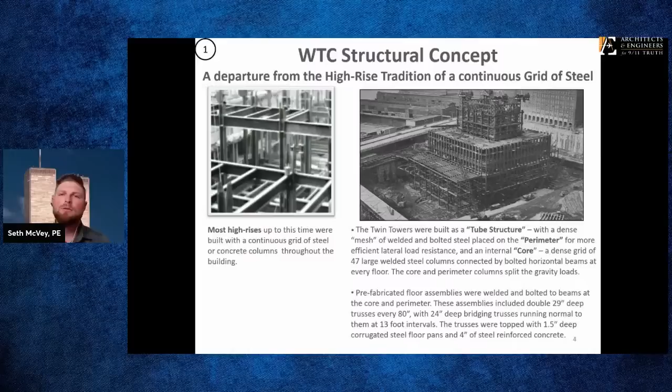John Schuler, another presenter doing this, likes to use the example of the Eiffel Tower, which I think is a really good one. You can see how the Eiffel Tower has this wide base - picture yourself standing with a wide stance in your legs, it makes it difficult to knock over a structure of this type. The perimeter columns acted in a similar fashion, holding the lateral loads of any load that would be put laterally on the building.

Here's a plan view of World Trade Center buildings 1 and 2. You can see that they were 207 feet by 207 feet, so each floor was almost an acre. The largest floor span, on the long side of the core columns, was 60 feet connecting to the perimeter columns. The core itself was approximately 135 feet by 87 feet.

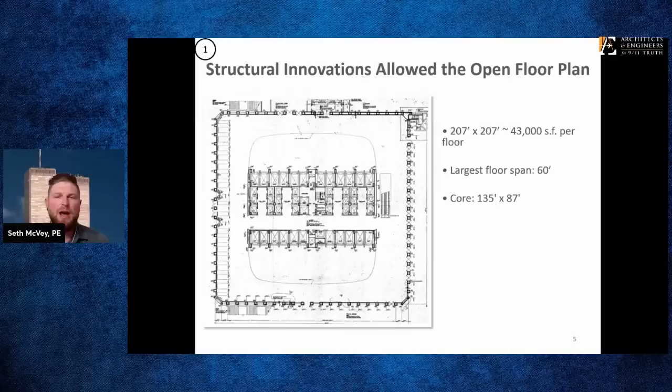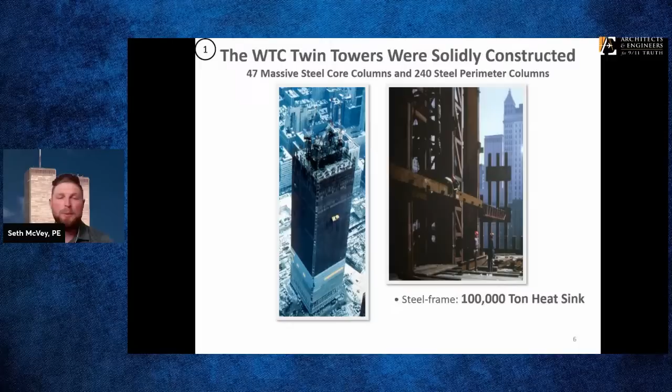Like I stated earlier, the core tubular structure consisted of 47 massive steel core columns and 240 steel perimeter columns - 60 columns on each side, spaced at approximately 3 to 4 feet apart. There was a lot of steel in these buildings, which made them very resistant to any type of load they would experience.

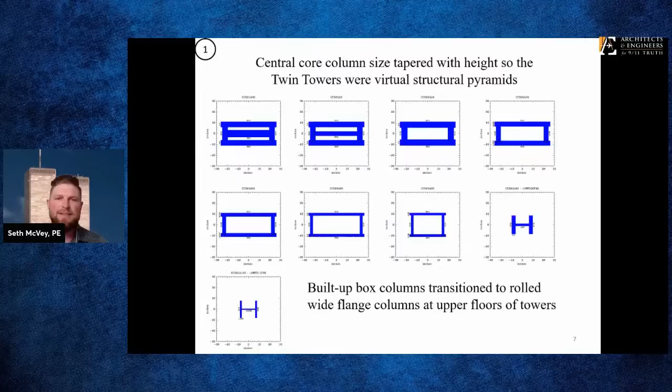And as you go up in altitude, you can see that the columns lessened in their denseness because they had less load to carry.

In addition to the thicknesses varying, there were also different strengths of steel used. 12 different strengths of steel were actually used in the construction of these two structures, in the perimeter columns of the towers, to accommodate the wind load and seismic stresses while keeping the gravity-induced unit stress on both perimeter and core columns on each floor the same. So they utilized 12 different steel strengths so that the floor weights would distribute evenly to the inner tubular columns and to the perimeter columns, so you wouldn't get warping of floors or anything like that. They did account for the wind and seismic loads, as we'll see here in a little bit.

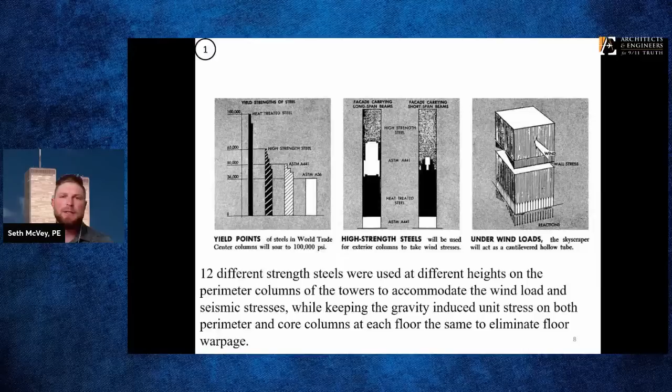So let's get into a little bit about the plane impacts.

The North Tower was hit first, at approximately 8:45 in the morning. Flight 11, American Airlines Flight 11, a Boeing 767, crashed into the north face of the North Tower at approximately the 96th floor, going approximately 473 miles per hour. The plane that hit the South Tower hit at approximately the 85th floor at approximately 9 o'clock in the morning. It was also a Boeing 767 going approximately 566 miles per hour.

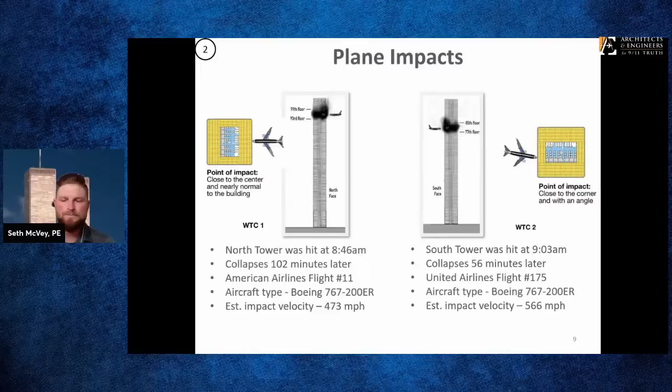You can see here on the right that the plane impacted the South Tower along the short edge of the tubular structure at an angle, whereas the plane that hit the North Tower hit the tower pretty much straight on, but along the long side of the tubular structure, which is important to consider, which we'll get into in a second.

This is the North Tower. You can see where NIST has claimed, and we agree with, the impact location of the plane entering the building. It entered the long side of the tubular structure core, and it was pitched downward at approximately 11 degrees. It hit at the 95th floor, but NIST claims that collapse initiated on the 98th floor.

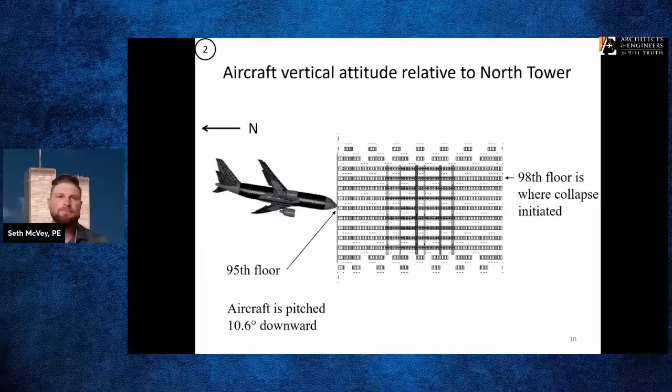According to the NIST report, the wings are rolled 25 to 30 degrees from the horizontal.

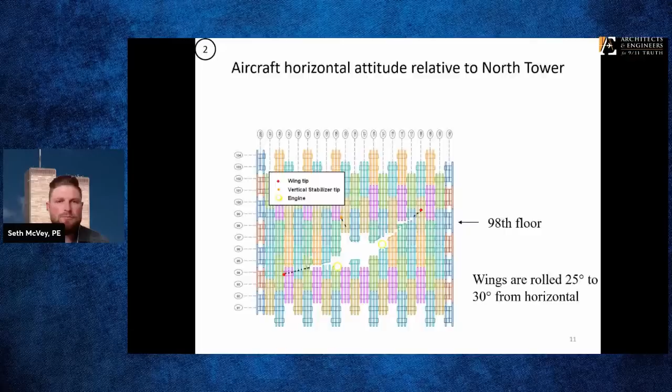Here's a video of Charles Thornton, a structural engineer who was part of the FEMA investigation, discussing the wind loads and lateral loads that the World Trade Center buildings were intended to take. The fact that they were designed to resist over 13,000 tons of wind pressure meant that they could not be knocked over.

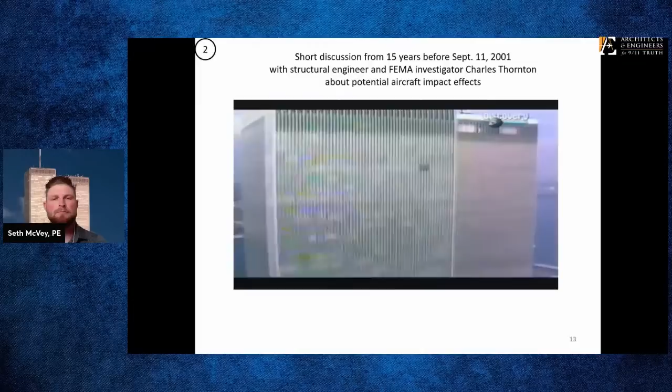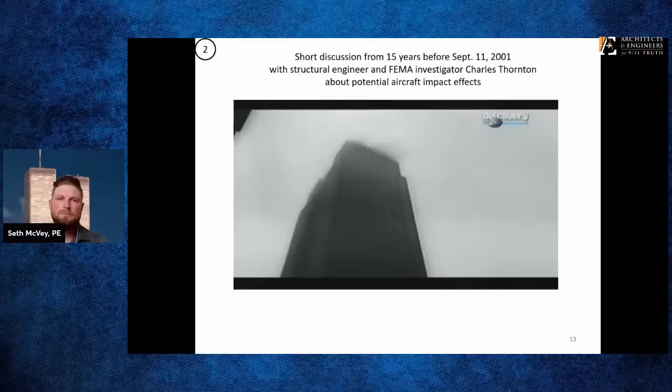In a remarkably prescient interview given over 15 years ago, Charlie Thornton, now one of the investigators, considered the scenario: 'Well, 13,000 tons is a lot of force. People always talk about an airplane crashing into a building. In 1944 or 45, a plane did crash into the Empire State Building. But the largest aircraft flying today, at least commercially, the 747 fully loaded, is on the order of 300 tons. So if you think about a 300-ton element crashing into a building that's been designed to carry 13,000 tons, you can see that an aircraft crashing into the World Trade Center would probably not do anything to the major building. It could affect localized structural elements, could knock out a column, and there could be some damage. But as far as a plane knocking a building over of that type, that would not happen.'

Since the Empire State accident had shown that a plane could crash into a New York skyscraper, the designers were forced to consider this. You heard it from Thornton that these buildings were designed to take 13,000 tons of lateral load, including wind, seismic, or an extreme event like a plane crash. Although at the time of construction a Boeing 767 hadn't been created yet, the fact that it overcompensated for those lateral loads means this building could not be knocked down by an airplane impacting it.

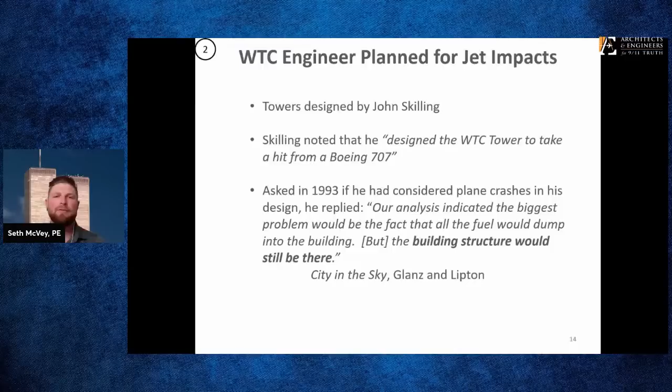The World Trade Center engineer who designed the buildings was a guy named John Skilling. Skilling noted that he designed the towers to take a hit from a Boeing 707. In 1993, he was asked if he had considered plane crashes in his design. He replied, 'Our analysis indicated the biggest problem would be the fact that all the fuel would dump into the building, but the building structure would still be there.' So he over-designed these structures with huge factors of safety, enough to take a very large airplane hitting it at 400 to 500 miles an hour.

So further into the impact of the planes, the robustness of the perimeter frame tube system and the large size of the buildings helped the towers withstand the impact, according to NIST. The structural system redistributed the loads without collapsing at the places of aircraft impact. NIST even admits that because of the over-design of the perimeter columns, tubular columns, and steel trusses in the building, there was no way, due to redistribution of loads and redundancy within the structure, that this building would have fallen — let alone fallen within its own footprint in a symmetrical collapse.

The towers withstood the initial impact of the aircraft. The buildings had more than 1,000 times the mass of the aircraft, so this ability to withstand the initial impact is hardly surprising. Numerous people have admitted that this building could not have collapsed due to the impact from the planes.

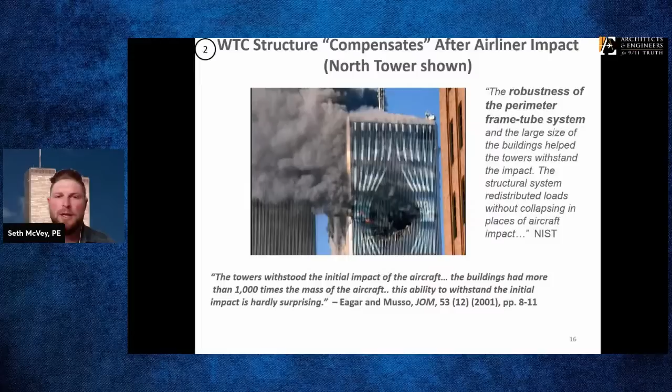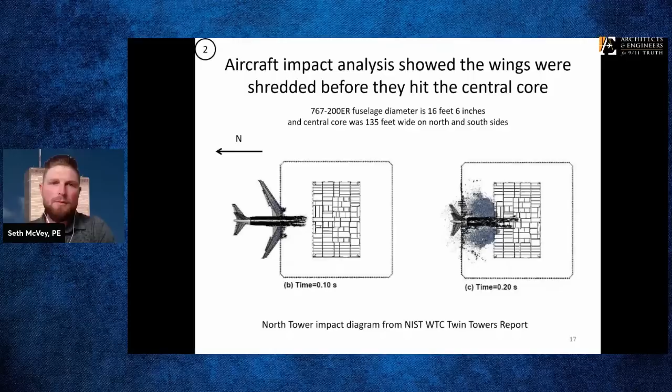Aircraft impact analysis showed the wings were shredded before they hit the central core. This is a diagram of the North Tower — the figure on the left shows the plane entering the structure and shredding the fuselage, and on the right you see the plane after its wings were shredded due to the complexity of the frame itself. The columns and steel trusses just shredded this airplane. There's no way it could have reached the core columns at the speed it was going — it was dramatically demolished by the time it was even inside the building.

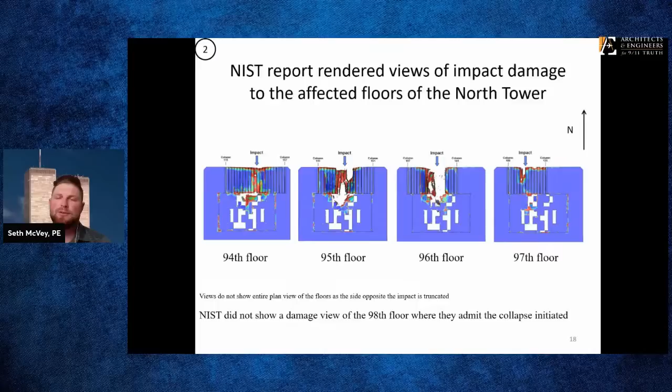This is from the NIST report, showing rendered views of the impact damage on the North Tower at various floors. You can see the 94th floor had not so much damage, the 95th floor a little more, and the 96th floor, where they say it actually entered the building, has the most damage. The 97th floor again shows not too much damage. But NIST claims that at the 98th floor — which they don't even include a diagram for — is where collapse initiated. Yet just looking at the 97th floor, the impact damage to the 98th floor couldn't have been that much. So why did it fail there?

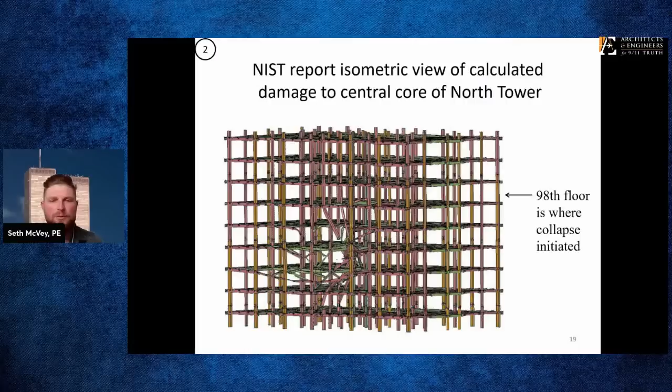Here's an isometric view of the impact damage done to the steel frame of the structure. You can see the 98th floor called out here — not too much damage on the 98th floor. If you'd think this thing would have failed from anywhere, it would have been the 96th floor where it actually hit. Okay, jet fuel effects.

Like John Skilling stated earlier in that quote I gave you guys, he was mostly concerned with jet fuel dumping into the building and causing issues that way. But in the NIST report, they did a sensitivity test on the jet fuel effects at various floors.

You can see here in the diagram the amount of fuel that was left on each floor. On the 98th floor, where collapse initiation happened, there was only 240 gallons of jet fuel supposedly there. However, they also state in their sensitivity study that the amount of fuel spilled in the simulation only influenced the results of the first few minutes. The long-term behavior of the simulated fires was unaffected.

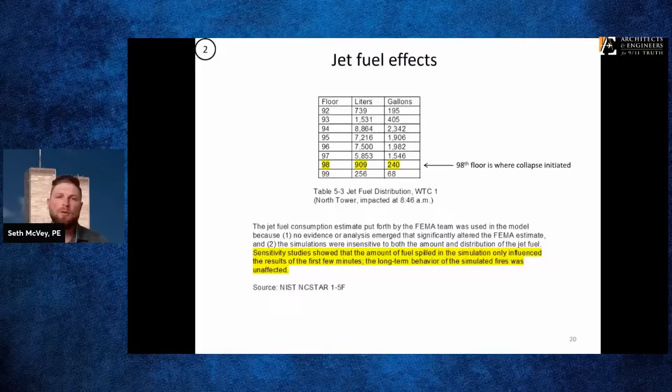So essentially what that's saying is that the long-term effect of jet fuel burning and melting the steel was not there. The jet fuel burned up, aerosolized, and upon impact - which was the explosions you see supposedly when the planes hit the towers - most of the jet fuel was actually burned up in those first few seconds, and it wouldn't have caused melting of steel or catastrophic behavior like we witnessed.

So this is a summary of why the aircraft impact and jet fuel would not have caused the collapse. The wings would not have made it to the central core, which is where the jet fuel was kept, so there was no fuel dumping down the elevator shafts or anything like that. They were shredded upon impact.

And like we saw in the diagrams, only the fuselage, if it made it to the core columns, would have affected the core columns. Most of the jet fuel was aerosolized on impact, again referring to the explosions, with much of it remaining outside the building. The fuel which did enter the building burned up within minutes due to the fires.

The redundant steel frame redistributes load, so the aircraft impact could not have caused collapse due to the redundancy of the structure itself. And like I mentioned earlier, the factor of safety John Skilling used to design against vertical collapse for the perimeter columns was 5-to-1, meaning each perimeter column was designed to take 500% of the expected load it was to carry.

And for the central core columns, they were designed to take 300% of the loads they were expected to experience. This is far too high for the impact damage to approximately 20% of the columns to have caused collapse.

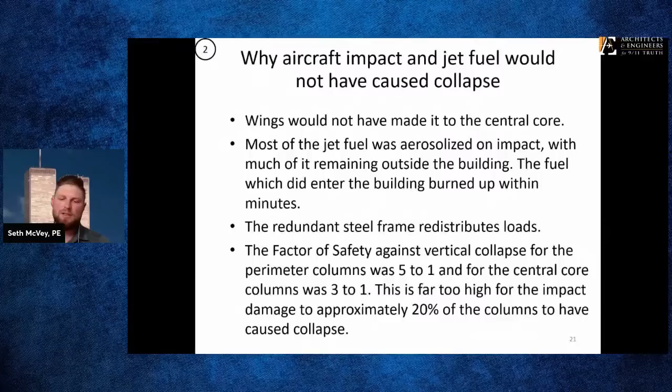It should be noted that this 20% of columns damaged was across 5 floors, since these planes hit near the top of the buildings. So you still had 90-plus floors of non-damaged columns to resist the load and provide redundancy. So for the towers to fall as they did just doesn't make any sense.

So getting into the NIST column failure theory - the official United States government theory - this is what they say: the exterior columns were pulled inward by heating and sagging of the floor trusses, causing them to buckle and initiate the global collapse.

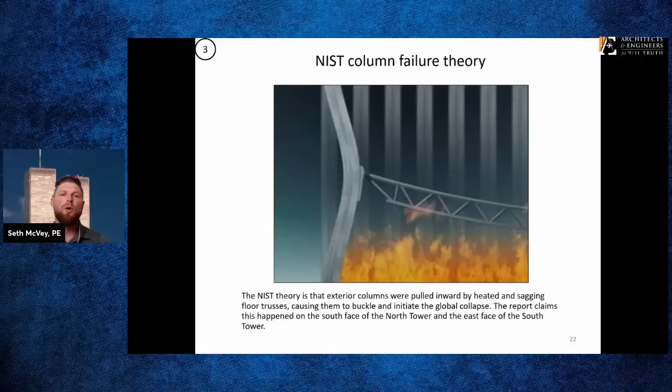The report claims this happened on the south face of the North Tower and the east face of the South Tower. So as the fires burned, they heated up these steel frames and started to pull on the perimeter columns, causing global collapse.

Sagging in the detailed truss model - so after the members buckled, the truss pulled the exterior columns in. This is from NIST, this is what they claim: after web members buckled, the truss pulled the exterior columns in. The tension force ranged from 9 to 14 kips per column in this model at the exterior column.

You can see as the temperature increased, it started to pull in the columns on the perimeter through these trusses. And in the upper figure here, which was a finite element analysis done by NIST, there was buckling of web members. So they had vertical displacement and sagging in these trusses, which they claim pulled on the perimeter columns between 9 and 14 kips.

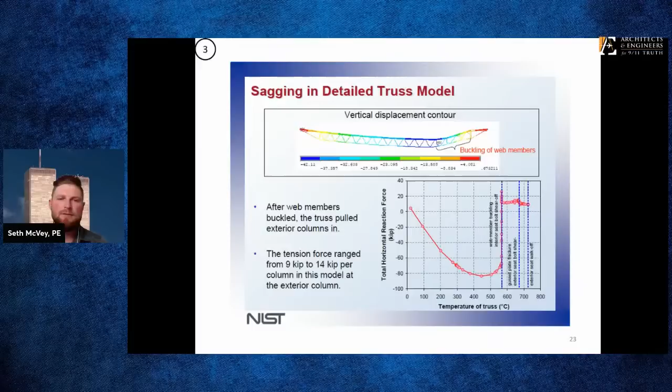This is the ANSYS model of the 96th floor from NIST of World Trade Center Building 1. ANSYS is a commercial finite element software used for modeling complex structures, including buildings and bridges and anything else you want to do. You can see here they have the floor trusses, then the bridging trusses in between, and the perimeter columns here.

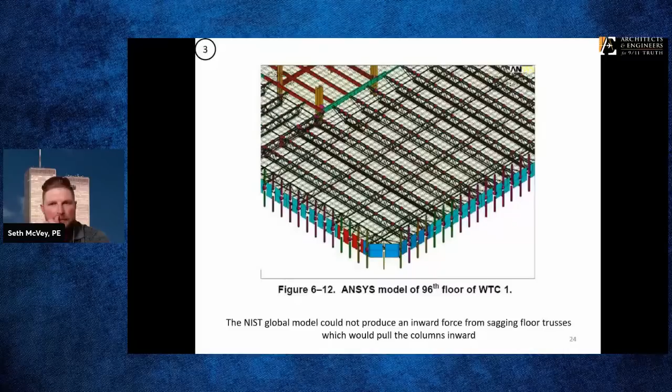What's important to note is that the NIST global model of this floor could not produce an inward force from sagging floor trusses that would pull the columns inward. So that 9 to 14 kips they claim was able to pull these columns inward, leaving the south and east faces of the north and south towers unsupported for that whole floor, there's just no evidence to support that.

This is an artificial force. It's not a real force. There's no reality behind it. They needed to apply this force in order to get the model to react the way they said it would. So they're just pulling stuff out of their you-know-whats.

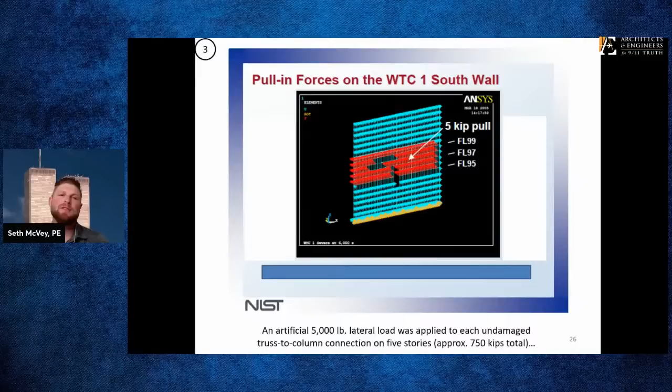Again, this was applied over 5 stories for a total of 750,000 pounds of artificial force that the buildings did not experience.

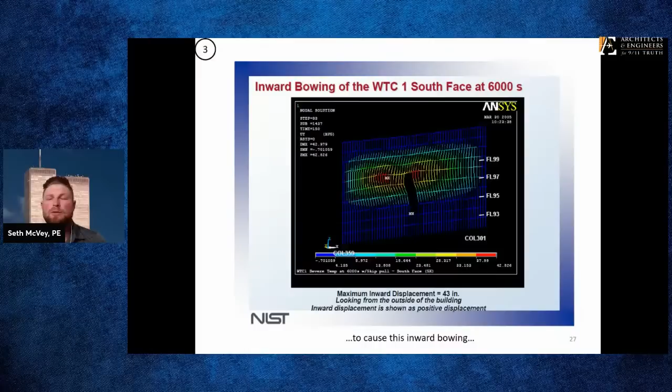To cause this inward bowing, that 750,000 pounds, to get the bowing shown on screen here with a maximum deflection of 43 inches—we're looking at the face of the building here—they needed to apply that 750,000 pounds, which was not there. So without that, the deflection they claimed happened, 43 inches, to get those columns to buckle and fail, is not real. It's crazy.

The NIST report explanation for collapse initiation and propagation of the North Tower: this is what they say about the North Tower collapse. With the continual increased bowing, as more columns buckled, the entire width of the south wall buckled. Because of this artificial force they put on, they say the bowing of the perimeter columns continued to increase, and as more of them buckled with that force, the entire width of the south wall buckled—all 60 columns along that side buckled because of this artificial force.

Instability started at the center of the south wall and rapidly progressed horizontally towards the sides. As a result, the buckling of the south wall significantly unloaded, redistributing its loads to the softened core through the hat truss and to the east and west walls through the spandrels. So, like we said earlier, the loads were redistributed, but as John Skilling stated, the redundancy of the system and the factors of safety used meant these core columns could accommodate that type of load. It had a factor of safety of 3. It mentions a hat truss here, which we'll get into in a second.

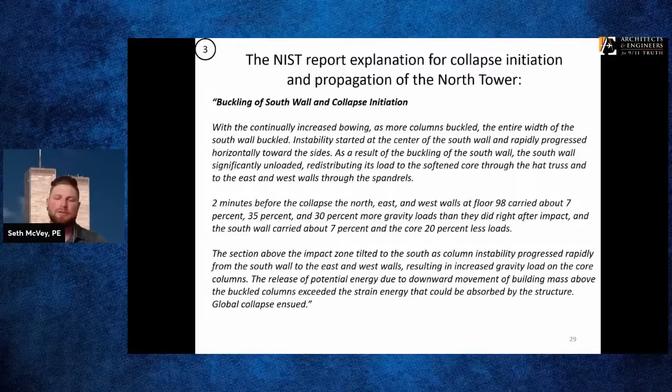The section above the impact zone tilted to the south as column instability progressed rapidly from the south wall to the east and west walls, resulting in increased gravity load on the core columns. The release of potential energy due to downward movement of building mass above the buckled columns exceeded the strain energy that could be absorbed by the structure. Global collapse ensued. So this is where you get into a bit of the progressive collapse theory.

The problems with this NIST report explanation for the collapse initiation and propagation: there's no evidence or basis for the claim that sagging trusses could pull in the south wall of the North Tower. Because they applied this artificial force of 5,000 pounds at every truss column connection, they were able to get it, but that load is not reality.

This wasn't observed in reality based on the footage. Like it says, the NIST model did not generate the loads on the south wall columns needed to pull them inward.

NIST applied artificial loads to the columns with the claim that it was necessary to match the photographic evidence. With a factor of safety of 5, the load increase to the east and west walls of 35 and 30% respectively would only increase the demand on those columns to about 27% of their capacity. So there's no reason to expect them to fail.

NIST simply assumes a horizontal propagation across the building. NIST simply assumes global vertical collapse would ensue, and that relies on a paper by Northwestern University professor Zdenek Bazant for an explanation of vertical collapse propagation.

The video evidence shows the core columns are what actually collapsed first. Here we'll see a video of the collapse of the North Tower. What's important to watch in these videos is that the antenna appears to be what starts to fall first, before the outside perimeter column. Let's take a look.

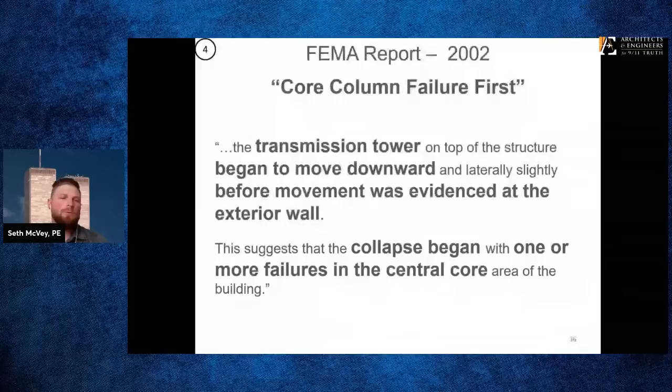FEMA says the transmission tower on top of the structure began to move downward and laterally slightly before movement was evidenced at the exterior wall. So these two government agencies don't even agree with each other, which isn't surprising. This suggests that the collapse began with one or more failures in the central core area of the building. Again, that's from the FEMA World Trade Center Building Performance Study.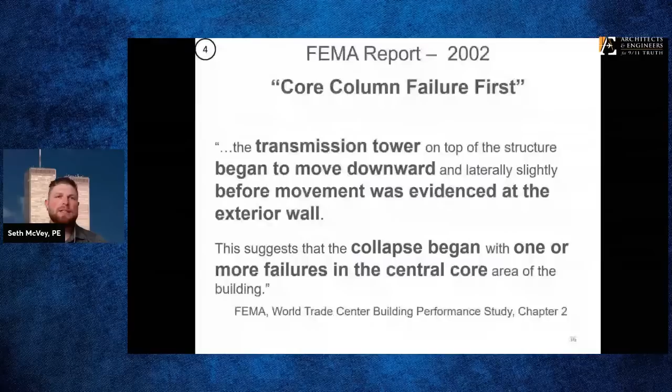So let's talk about this hat truss, because we saw in the previous video and the frames that we showed of the North Tower the antenna failing first, indicating that core columns were taken out. We need to go over the design of that. At the top of the North Tower, there's what's called this hat truss, which basically consisted of a truss layout that looked like a hat. The hat truss served to transfer vertical and lateral loads between the perimeter columns and the core columns.

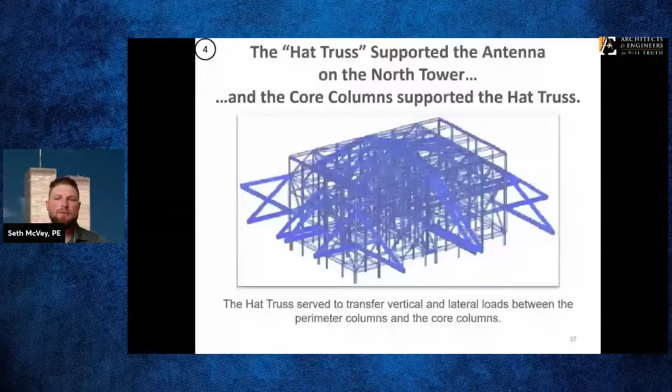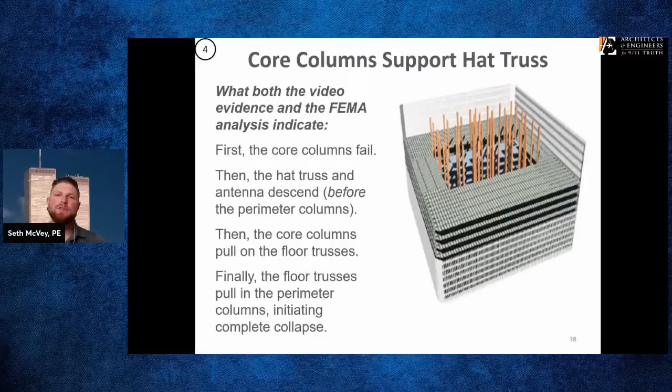But both the video evidence and the FEMA analysis indicate first the core columns fail, then the hat truss and antenna descend before the perimeter columns, then the core columns pull on the floor trusses, finally the floor trusses pull in the perimeter columns, initiating complete collapse. So this, what FEMA claims and what AE 911 supports, is that the core columns were taken out first, pulling on the hat truss, which then pulls on the perimeter columns, causing global collapse to ensue straight down into its own footprint. And that can only happen one way.

Complete collapse occurs with pulling of perimeter columns. You can see here in this photo, and then a looping video which I'll show, that the perimeter columns are what's being pulled in first.

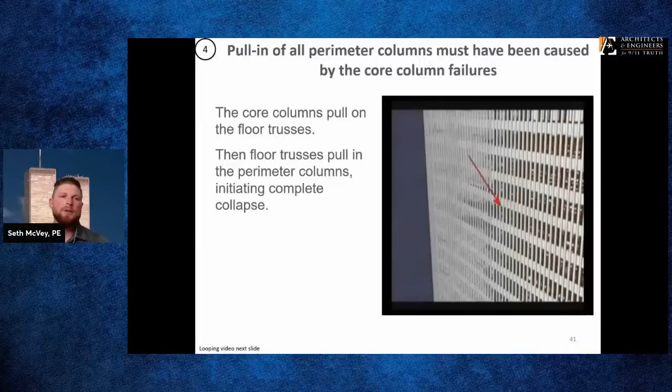You can see along both faces that each perimeter column is being pulled in. It's not one face that propagates outward horizontally and then causes the rest. They're occurring simultaneously, as if detonated, the core columns, then pulling on the perimeter columns all at the same time. The core columns pull on the floor trusses, then the floor trusses pull in the perimeter columns, initiating collapse, which you can see here in this schematic.

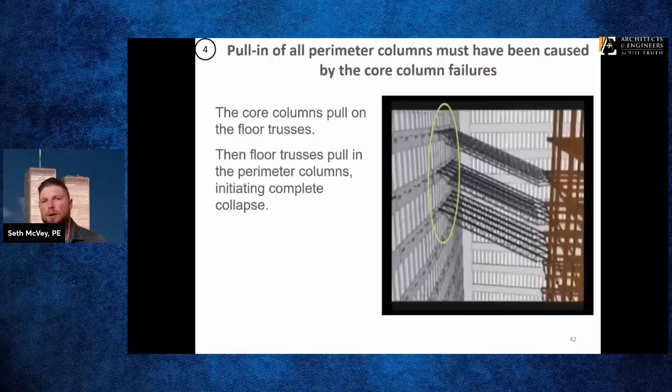So if the core columns are taken out first, you can see that the floor trusses are going to pull on the perimeter columns, which is what we just saw in the video on the previous slide, which makes more sense than what NIST claims.

So let's go over this progressive collapse theory, which NIST supports and which is defended by ASCE. This is the evolution of the progressive collapse theory.

On September 13th, 2001, two days after the attack, civil engineering professor Zdenek Bazant of Northwestern University submits the progressive collapse theory to ASCE. The ASCE published the progressive collapse theory in the article 'Why Did the World Trade Center Collapse?' in the Journal of Engineering Mechanics.

ASCE is the largest civil engineering organization in the United States, and it has a number of different publications that it releases, including the Journal of Engineering Mechanics. This is a journal which I'm subscribed to personally, which I read. I'm an ASCE member as well.

They published this article where Bazant claimed a large dynamic load would have occurred, caused by what he termed a powerful jolt, that would have overcome the reserve strength in the columns below. That was done in January of 2002, four months after the event, claiming that this progressive collapse theory is what caused the vertical collapse of the structure.

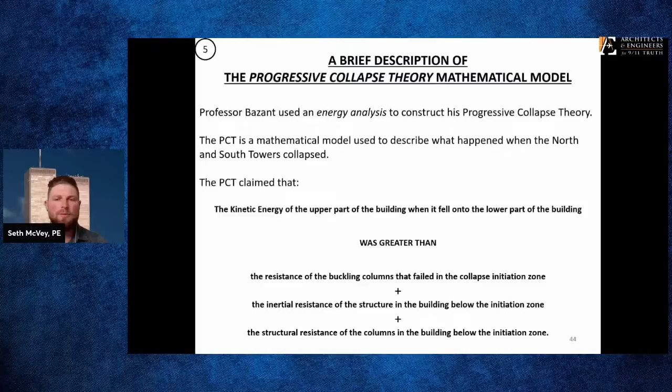In mathematical notation, this is what it reads: E1 being the kinetic energy of the moving mass of the building falling down. E2 is the sum of the resistance to buckling of columns in the initiation zone. E3 is the conservation of momentum of the upper story hitting the lower part. E4 is the sum of resistance to collapse of columns in the lower part.

This structure was designed to be very redundant. The perimeter columns were spaced at 3 feet. There were 47 columns in the inner core. There were trusses at 87 inches, or 80 inches on center, with bridging trusses between them. The redundancy in this structure was just incredible.

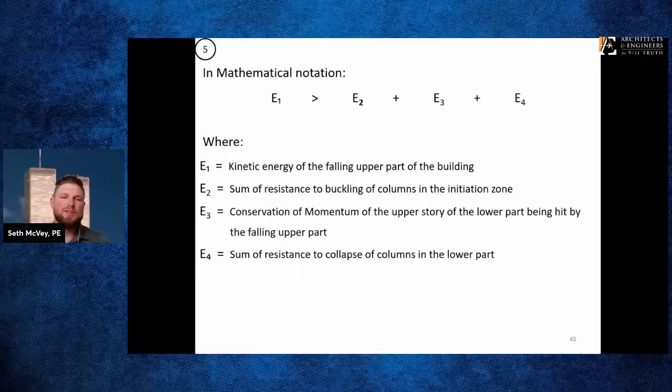So as we'll see, it provided a lot of resistance to any sort of jolt that would have occurred. Newton's third law of physics: for every action, there's an equal and opposite reaction.

A portion of the upper stories falling on—again, I have to point this out again—the planes hit at the top of the building. In what world does it make sense that 20 floors can take out 95 floors, where the 95 floors had progressively thicker columns than what was even in the upper stories of this building?

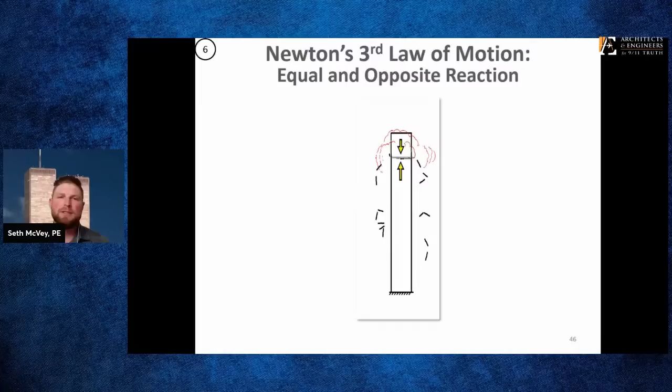So it just doesn't make any sense, because the opposite reaction from the floors on the columns beneath the falling mass up at the top would have resisted this just by physics.

So this was again the acceleration of the roof line of World Trade Center Building 1. This shows that the measurement of the fall of World Trade Center Building 1 was made by David Chandler, a physics professor, in late 2008, showing continuous acceleration about 2/3 of gravity with no deceleration, which is needed for load amplification observed at any time.

So if the progressive collapse theory is true, E4 in that equation I just showed you, there would have been some deceleration of the mass falling, because as any engineer knows, even after a column buckles there's still some resistance left. Because there was continuous acceleration about 2/3 of gravity and no deceleration, you could say there was just no resistance left at all.

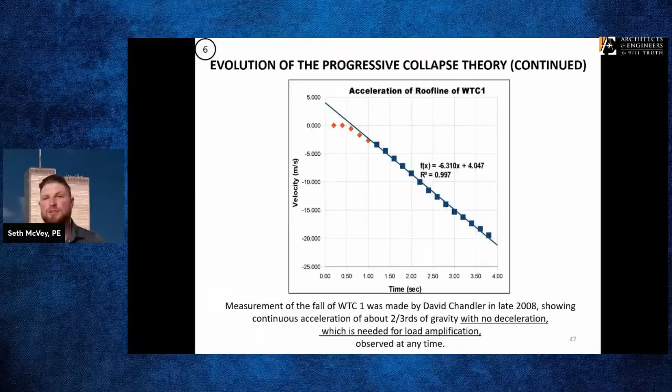Which is not reality. Going back to the evolution of the progressive collapse: Bazant and Le responded to criticisms in 2008 that they received within the 6 years of writing their initial paper, which was published by the Journal of Engineering Mechanics.

In 2009, MacQueen and Szamboti published 'The Missing Jolt, a Simple Refutation of the NIST-Bazant Collapse Hypothesis' on the website Journal of 9/11 Studies. Then David Chandler published 'Destruction of the World Trade Center North Tower and Fundamental Physics' on the same website in 2010.

So all of this, the acceleration models I just showed you, and then the free fall collapse of World Trade Center Building 7 which I showed you last week, was published in 2010 with David Chandler's paper. Because of these two papers, Bazant and Le decided they needed to defend their theory again in a paper titled 'Why the Observed Motion History of the World Trade Center Towers is Smooth.'

MacQueen and Szamboti challenged Bazant and Le in their paper by saying that there was not a jolt that could have happened there. It just wasn't observed. There's no evidence for it.

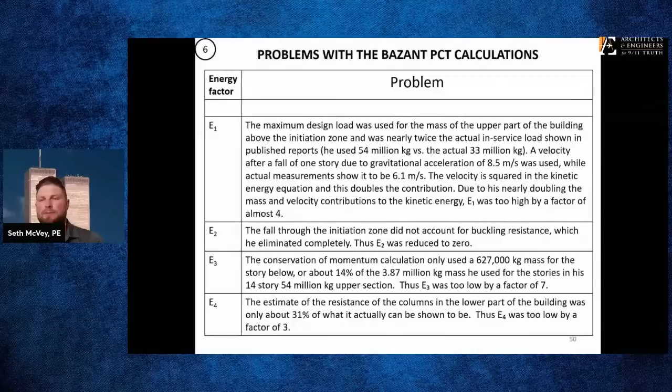The estimate of the resistance of the columns in the lower part of the building was only about 31% of what it can actually be shown to be. Thus E4 was too low by a factor of 3. So essentially he reduced all of the resistance factors and upped the kinetic energy applied to them, thus verifying his progressive collapse theory.

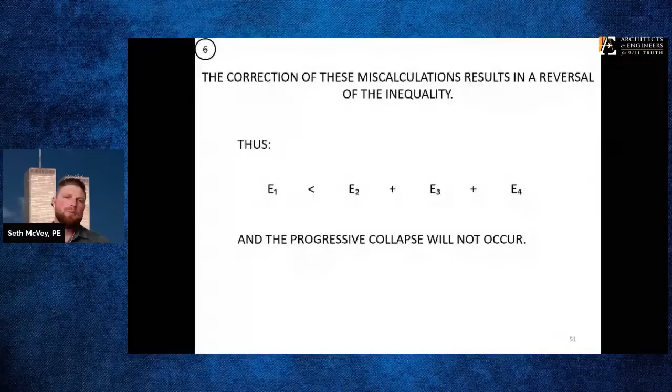Thus E1 is less than E2 plus E3 plus E4, and progressive collapse will not occur, but the input data he used is incorrect. Bazant's theory had the following errors: free fall acceleration through one story, max design load upper section mass, underestimated conservation of momentum, and underestimated energy dissipation of lower columns.

Here in blue you can see what Bazant's theory claims was the actual fall of the building, while Chandler shows with the dashed lines and solid line that there was actual resistance of the structure.

Downward movement should have been arrested after 2 seconds if collapse was natural, calculated with actual acceleration through one story, actual in-service load, upper mass, section mass, and correct conservation of momentum. The solid line shows that based on John Skilling's design, with safety factors of 5 for the perimeter columns and 3 for the core columns, the redistribution of load would have stopped the progressive collapse after 2 seconds because of the strength of those members.

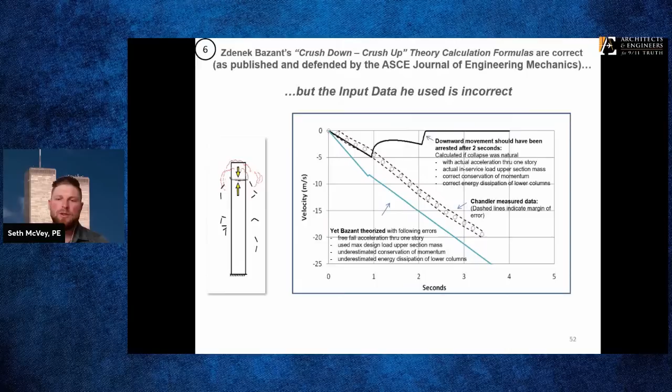In a gravitational collapse you would see the top 12 stories relatively intact during collapse, but that's not what we see here. This photograph shows the top 12 stories, which Bazant claims caused this progressive collapse through a huge amount of kinetic energy falling on the bottom floors, basically disintegrated. So it wasn't even there to fall.

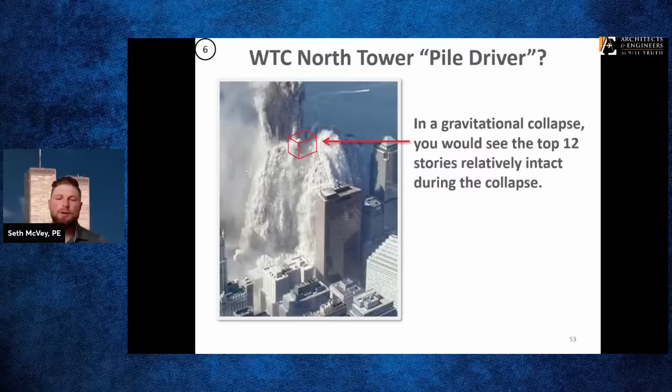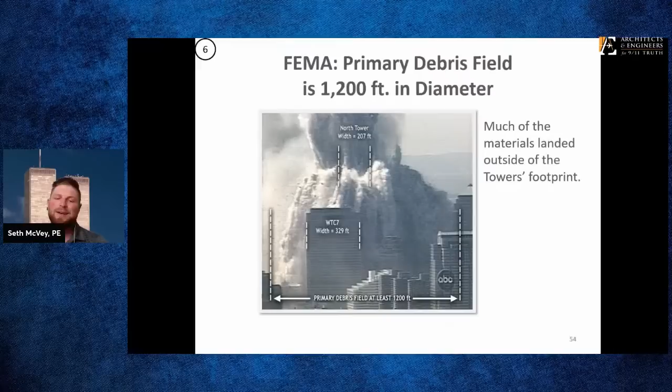Much of the material landed outside the tower's footprint. You can see here that the primary debris field was at least 1,200 feet. So the 12 upper stories were not intact enough to even cause the progressive collapse theory to ensue.

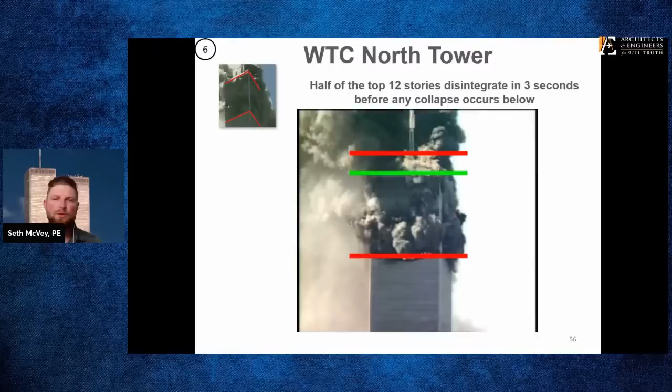Half of the 12 stories disintegrate within 3 seconds before any collapse occurs below. You can see here that half of those 12 stories are just completely gone before it even hits the lower part of the building.

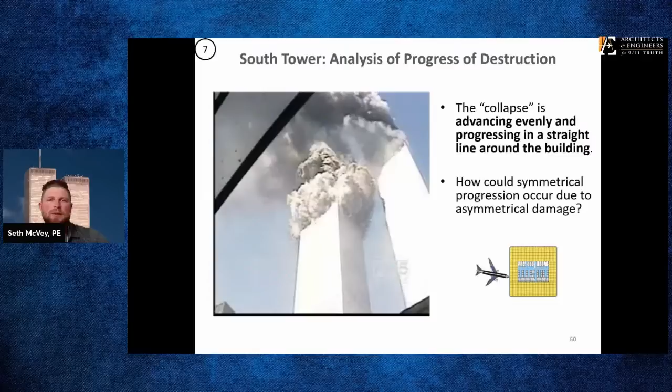You can see the tower falling down first, the south tower onset of destruction. The collapse advances evenly, progressing in a straight line around the building. How could symmetrical progression occur due to asymmetrical damage? As shown on the bottom right of the screen, there was an asymmetrical entrance into the building, yet the building fell down symmetrically within its own footprint.

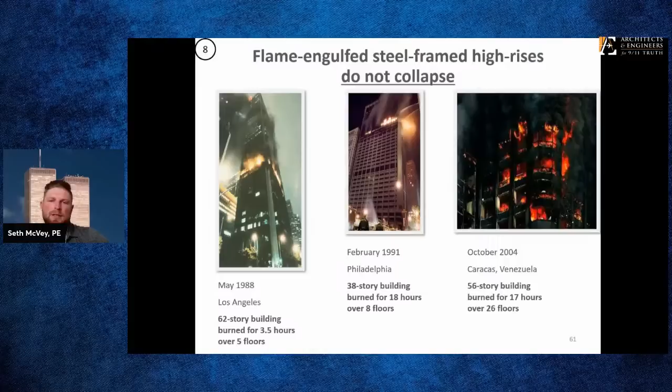As stated earlier, no other high-rise buildings have failed due to fire. We have many examples: a 62-story building in Los Angeles burned for a number of hours over 5 floors and didn't fall. In Philadelphia in 1991, a 38-story building burned for 18 hours over 8 floors and didn't fall. In Caracas, Venezuela, a 56-story building burned for 17 hours over 26 floors and is still standing.

So we're getting into the destruction of evidence. Structural steel from the World Trade Center has been and continues to be cut up and sold for scrap.

This is Bill Manning, editor-in-chief of Fire Engineering magazine. He demanded a stop to the destruction of evidence.

Such destruction of evidence shows the astounding ignorance of government officials to the value of thorough scientific investigation. What did they have to show? Of the materials that were collected, however, there seems to be evidence of more than just fire on the steel. Very little effort was made to preserve the evidence related to the unprecedented collapse of these three buildings—easily the three largest and most perplexing structural failures in history.

When did you become aware that the steel from the World Trade Center was being sold off? I think it was on the order of a week or so before we arrived on site, on October the 5th, I believe it was. So in other words, the city was selling or disposing of material within two weeks of the actual event?

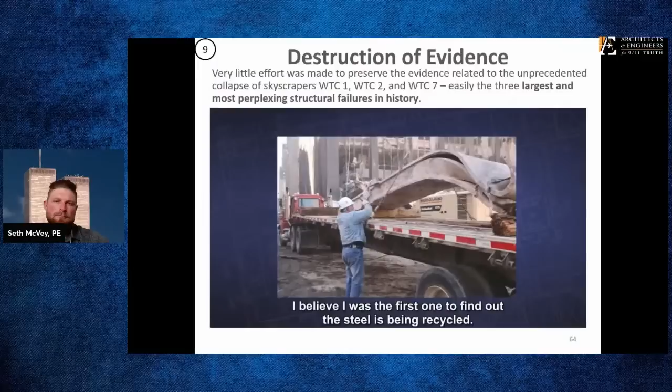I believe I was the first one to find out that the steel was being recycled. New York Times reporter Jim Glanz told me two weeks after the collapse, and I tried to contact the city, and the New York Times reporters tried to make sure we could have access to the steel to do the research. It was not happening. I just think there's so much that's been lost in these last six months that we can never go back and retrieve. And it's not only unfortunate, it's borderline criminal.

400 truckloads per day of material were taken away from the World Trade Center site and sent to China for recycling. There were laws violated in the destruction of that evidence. For the American Society of Civil Engineers to ignore those events is extremely disturbing and is, in my opinion, a violation of their professional code of ethics.

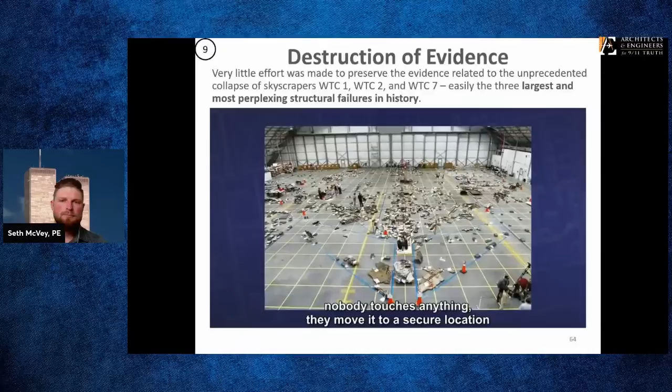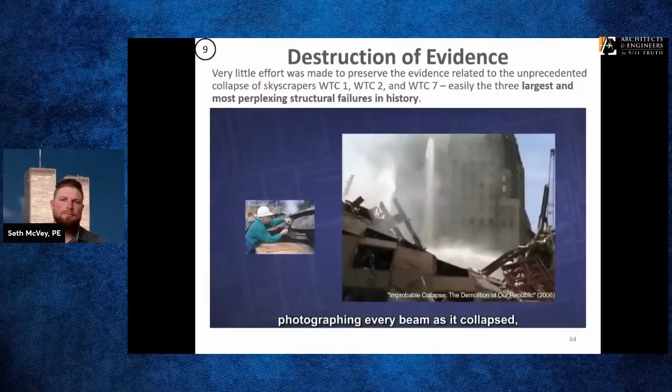It was contrary to the way all investigations are done. If an airplane crashes, they seal off the entire area, nobody touches anything, they move it to a secure location, and they reconstruct the aircraft. Normally, when you have a structural failure, you carefully go through the debris field, looking at each item, photographing every beam as it collapsed and every column where it is in the ground, and you pick them up very carefully and look at each element.

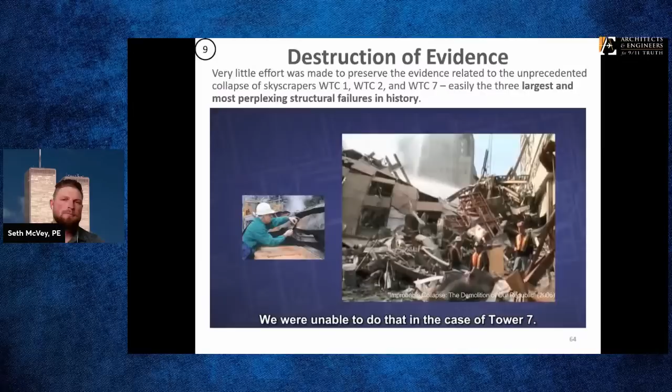We were unable to do that in the case of Tower 7. You can't do science when you are deprived of the evidence and when your hypothesis is the least valid instead of the most likely—when the most likely hypothesis in the case of Building 7 wasn't even mentioned. This is not science. It's trying to prove preconceived ideas.

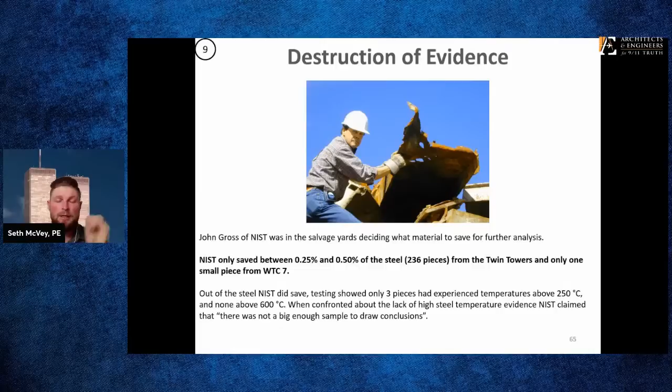So the destruction of evidence was just astounding. They didn't keep anything. I'm going to go through this quickly. There were hot spots, surface temperatures which exceeded very high temperatures. The official reports by NIST, FEMA, and the 9/11 Commission omit any mention of large quantities of molten metal observed in the basement areas of the Twin Towers.

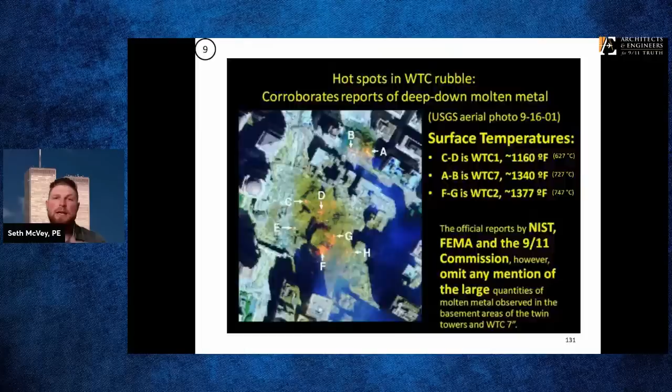Summary of the problems, wrapping up here. The claim that the upper part of the towers crushed the lower part of the towers violates the law of conservation of momentum and the law that for every action between bodies there's an equal and opposite reaction, as shown by the measured smooth, uninterrupted descent of the upper portion of the North Tower.

NIST claims that the floor trusses in the aircraft impact zone pushed outward on the perimeter columns with a force of about 80 kips before starting to sag and pull the columns inward, causing the buildings to collapse. Yet there is no evidence to support this claim—extensive photos and videos of the tower should show outward bowing of the perimeter columns, but show none.

NIST imposed an unrealistic artificial 5-kip force on each floor truss-to-column connection over five stories, for a total of 750 kips applied artificially to that face of the building, which cannot be justified by any rationale. NIST does not investigate or explain the global collapse, which occurred after the collapse initiation was supposedly triggered by the column failures in the impact zone.

NIST simply states that global collapse ensued. The NIST collapse sequence is initiated by the failure of the floor trusses in the impact zone and subsequent pulling of the perimeter columns. But the sequence ignores the fact that the core columns failed first, as evidenced by the videos.

The NIST report fails to provide any information suggesting that the load capacity of the core and perimeter columns was exceeded at any time during the collapse sequence. NIST ignored the fact that the factor of safety of 3 in the core columns and 5 in the perimeter columns would have prevented the failure mechanism theorized in their collapse initiation model.

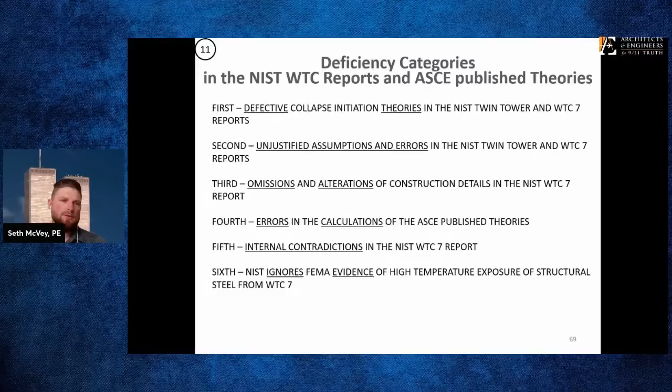So the deficiency categories: defective collapse initiation theories in the NIST Twin Tower and World Trade Center 7 reports. Second, unjustified assumptions and errors. Third, omissions and alterations of construction details in the NIST report. Fourth, errors in the calculations of the ASCE published theories. Fifth, internal contradictions in their own reports. Sixth, NIST ignores FEMA evidence of high temperature exposure of structural steel. Seventh, NIST and ASCE refuse to respond to peer criticism.